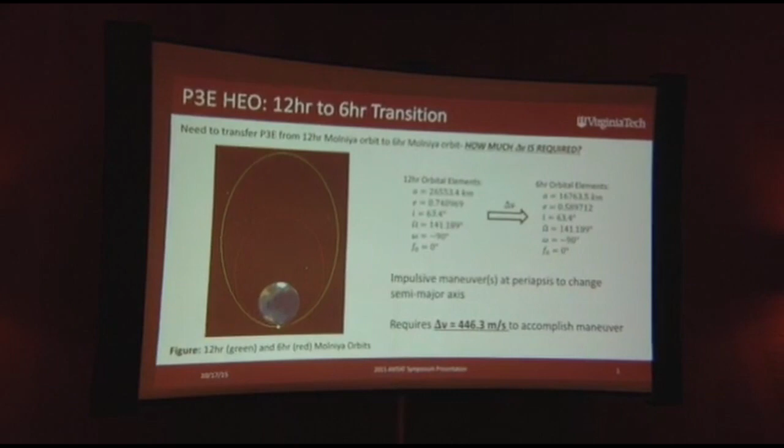So let's talk about that giant orbit transition. This is a huge orbit transition. We're basically cutting the orbit in half. So you got a 12-hour Molniya orbit. It's inclined at 63.4 degrees. The reason is because when it's inclined at 63.4 degrees, the argument of periapsis will not precess, according to averaged orbital element theory.

And then, the Russians figured this out, and they did some kind of spooky stuff back in the 50s and 60s with their satellites. But we like this because it gives you a very predictable ground track. Okay, so what happens if you want to try and go from a 12-hour orbit down to a 6-hour orbit? You got to do a burn at periapsis.

So let's say we've got a periapsis, so the altitude of the satellite that's closest to the Earth, of 500 kilometers, and then it's like 40,000 kilometers apoapsis up here. So if you want to lower your apoapsis altitude, you need to burn at periapsis, okay? And if we wanted to do that, just regular impulsive orbit element theory, you're going to need a delta V of 446 meters per second. That is just a ginormous amount of thrust for a satellite that currently does not have a rocket on board.

Can everyone see this figure? Trust me, it's awesome, it's there.

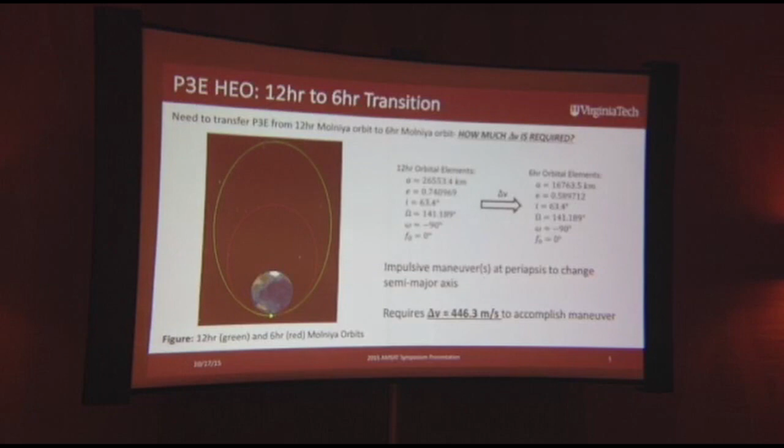All right, so we need to come up with a different approach. So there's two different approaches. Let's talk about engines only and then aerobraking, which I learned about how to do about a month ago, so it's fresh in my mind. So if we want to use engines only, let's just throw away the fact that the Earth has an atmosphere. We're going to keep the periapsis altitude at 500 kilometers, and every time it traverses periapsis, you do a quick little burn to lower the apoapsis.

Now, if you do it all in one burn or you do it in 1,000 burns, it does not matter. It's still going to take 446 meters per second of delta V. That's just how it goes. So it's a measure of how much fuel you have to use, how much energy you have to take away from the orbit to make that transfer.

Now, engine-only maneuvers are great because they can take less time to perform the maneuver. They're a lot easier to analyze, they're a lot easier to model, but they have the massive drawback that they require more fuel. I don't even have a rocket right now, okay? So we need more restrictive assumptions on the satellite and on the environment that it's operating in. And also, like I said, one large burn or lots of little burns still equate to the same amount of delta V. Okay, well, let's think about a different way to handle it.

So aerobraking has been used to great effect for Mars missions and other things where they're coming into a planet like Mars just screaming fast, and they want to lower the apogee of the satellite, apoareion. So this is a more realistic model because now the planet we're orbiting has an atmosphere, which I can tell you it does. It also has the nice advantage that it allows for a smaller engine to be used. So smaller engine, but you have to trade it off. You're going to have to turn the engine on more times in general.

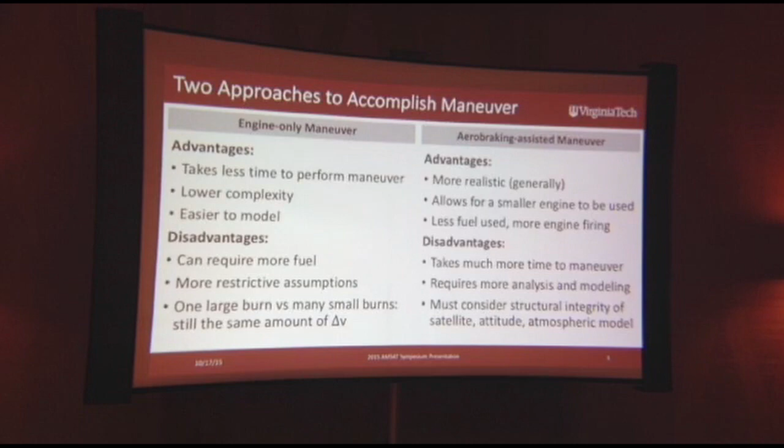Okay? So that's nice, but it does take a lot more time to do the maneuver. And it can be really hard to predict how long that maneuver will take. This takes a lot more analysis and modeling, so finding out that it took 446 meters per second of delta V for the engines-only maneuver, that took about 30 seconds. This aerobraking thing took me weeks to figure out because I didn't know how to do it.

Now, we also have to consider a much more practical issue, which is the structural integrity of the satellite. You're going to be flying through the atmosphere. Satellites are basically made of tin foil, and if you're lucky, they're going to have some strong support trusses in there. But satellites are not made to carry aerodynamic loads. And now we're talking about a satellite where we're actually going to have to worry about that. So, I'm not solving that problem for you. You just get to think about it.

That's for you. Also, we have to consider attitude because the pose of the satellite relative to the incident velocity is going to make a huge difference in how long it takes this maneuver to occur. And then there's the atmospheric model. Modeling the upper atmosphere is kind of hard. They've got entire branches of the Navy doing this. So in my analysis, I use the NRLMSISE-00 atmosphere model. If you've ever played with STK, it's a button you hit, you can use it.

All right, so we're going to talk about aerobraking now. So this required a lot more analysis. It wasn't just figuring out what the boundary conditions have to be and exactly how much delta V it is. Now we're going to be flying through the atmosphere. So going back to this initial condition right here, this green orbit, this is what we're starting from.

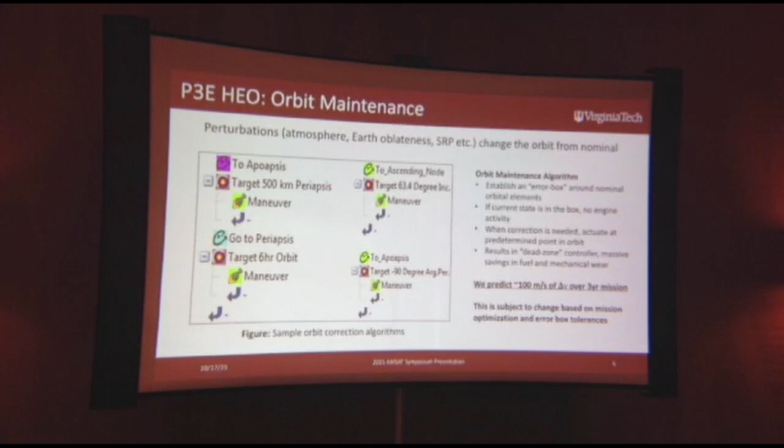All right. So now we're in our nice 6-hour orbit, so now we need to start doing orbit maintenance. The way we do this is we say, I've got some box of initial conditions that I want to stay in, okay? So I set up some bound on my periapsis and apoapsis altitude, eccentricity, inclination, argument of periapsis, all the orbital elements that I like to think about. So I've got some nominal set that I want to maintain, and then I just let it go. I've turned on every single perturbation that's in Satellite Toolkit. I've got the entire solar system. I've got a high-fidelity atmospheric model. I've got the WGS-84 Earth model.

I've got solar flux, geomagnetic flux. I got the tides. I've got everything, all right, because I can. It was awesome. And then we just let it go forward for 3 years, just because I picked 3 years. It can be as long as you want it to be.

And so the things that we need to correct are, we need to correct the argument of periapsis. So, in the ideal case, you set it to 63.4 degree inclination, the argument of periapsis isn't going to change. Well, that's only for the J2 perturbation, the kind of fat donut running around the Earth's equator. You add in other stuff, that number changes, and it's impossible to figure out exactly what it's going to be. So, the argument of periapsis is going to change.

The inclination is going to change a little bit. And we don't want it to change too much, because if the inclination changes, then the argument of periapsis changes, and we don't have a mission anymore. And then furthermore, you're flying through some atmosphere at 500 kilometer altitude. You gotta correct when it gets down too low.

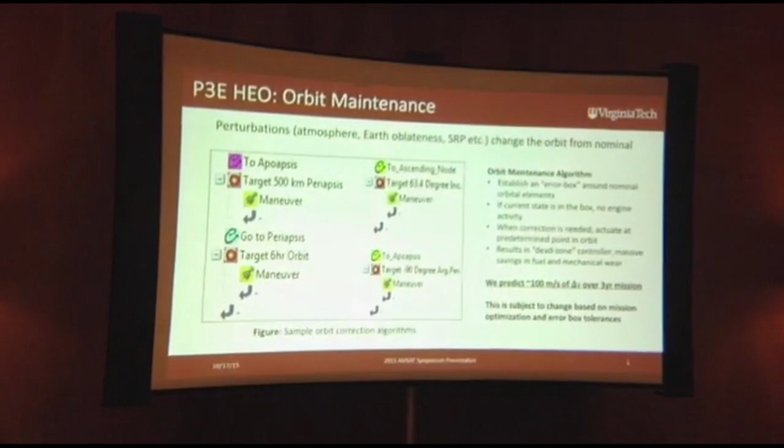But you can see, if you calculate all of the perturbation mitigation controllers, and you calculate the aerobraking, we are still about 1/3 of how much fuel we needed for just the engines-only orbit transfer. That's a huge win. All right, so this can be done. You put a little rocket on there, you can do these things.

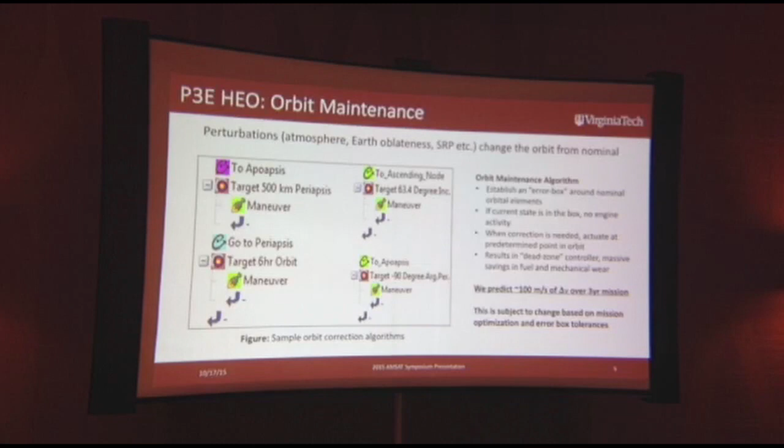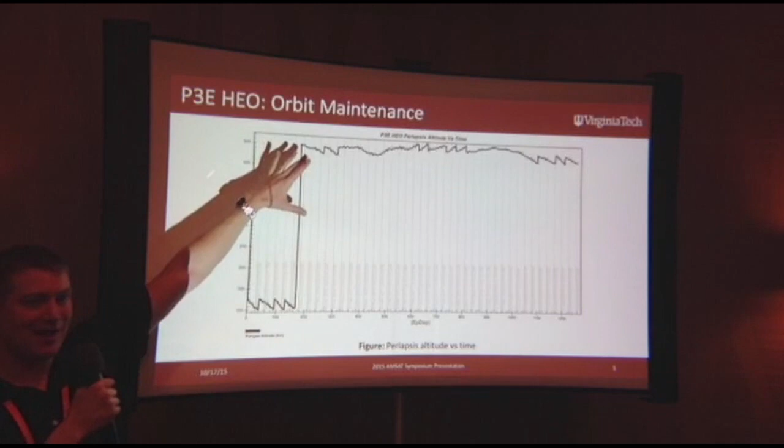We're looking at a couple different little maneuvers to push the periapsis altitude up so it doesn't fall into the Earth, which we can all agree is a good thing. And then once the satellite has pulled the apoapsis in enough, we have to shift it back up so it's got a 500 kilometer periapsis again. Because we don't want this thing down at 125 kilometer periapsis for 3 years. That's way too much fuel. That doesn't make any sense.

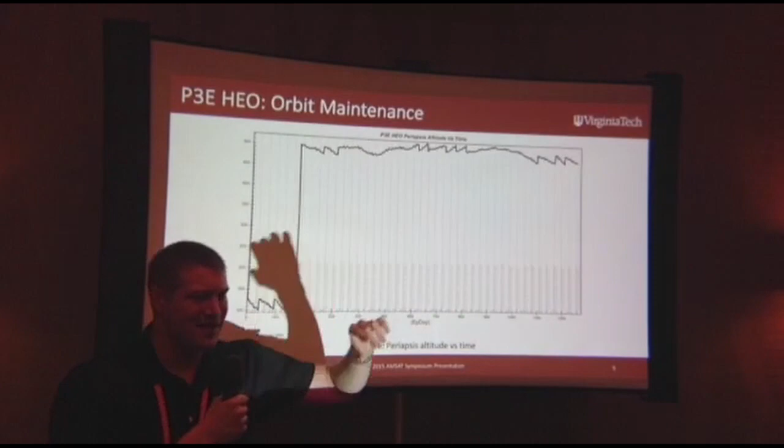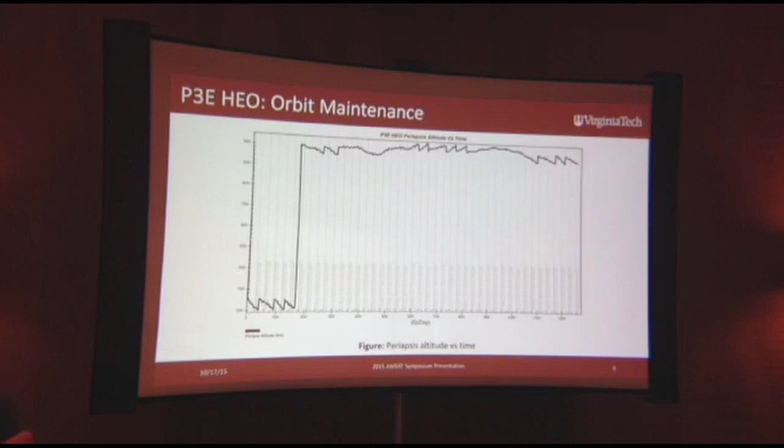So once it's up here at 500 kilometer periapsis, there's a couple quick little burns, and you can make this as coarse or as fine of a control adjustment as you want. This is up to you as the users to figure out what you want to do. But in general, the engines are not on. This thing is barely ever turning on its engines, and that's a big win for us.

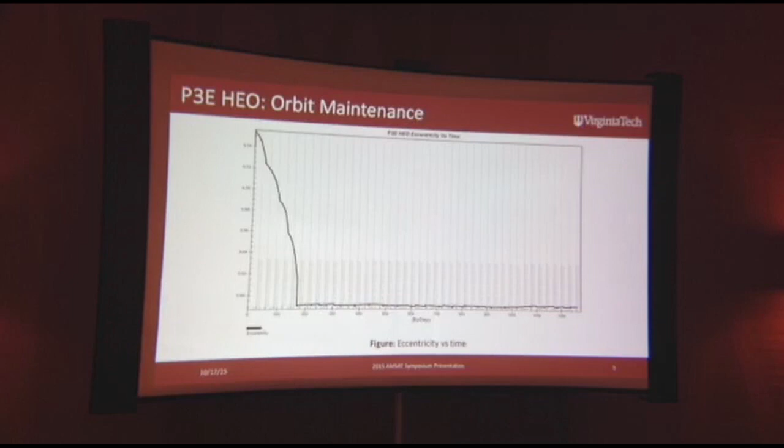Here's eccentricity. If your periapsis is the same and your apoapsis is changing, the eccentricity is changing, so that's all I have to say about that. Now, inclination. I predicted you only needed one plane change maneuver to correct the inclination, and that's good because inclination is extremely difficult to change. And in fact, the reason the Russians like using Molniya orbits is because where they launch from Kazakhstan, they want to get down to the geosynchronous belt to keep their satellites there. It's actually more fuel efficient to go to Mars than it is to go to geosynchronous. Come on. That's ridiculous.

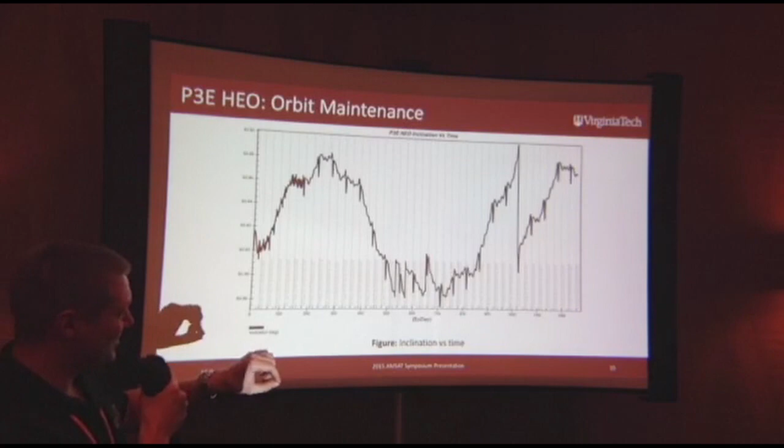All right. So this is just a quick little burn here to correct a 1/4 degree change in inclination. We only have to do it once, and we expect that. We want to try and minimize how many of these we have to do. And then correcting the argument of periapsis.

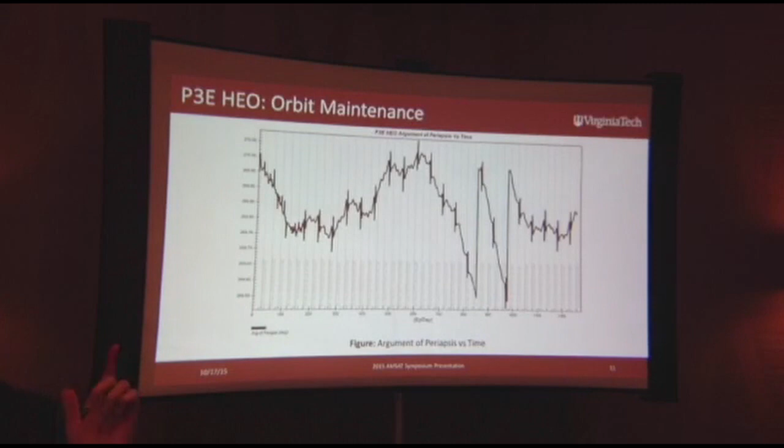This thing's going to be perturbed for 3 or 4 years. It's going to have to get changed eventually. So we found that we only needed 2 periapsis corrections, argument of periapsis. All right. So I've told you about aerobraking. I learned about aerobraking about a month ago. It was totally awesome.

And all this analysis leads me to believe that you probably don't have to put a very big engine on board P3E when you go to launch it. So we've got very sparse engine activity, and you want that since you currently don't even have an engine. And so there's room for additional optimization. So that's all I've got. I'll take your questions now.

I'll start with you. What kind of engines are you going to have on the spacecraft? No idea. Sorry, I don't know. I'm totally confused. Okay.

As I understand, the satellite will originally be put into a 12-hour orbit. Yes. Number one, why do we want to change that? It seems like it's a pretty good orbit. I thought you were going to say that, Bob. So, okay, we're being forced to change it because of other circumstances. I guess I understand that.

Are we concerned about the heating problem when we're doing the aerobraking? That's the other thing that worried me a little bit. Potentially. So this is something that I'm going to have someone that knows a lot more about heat transfer than me figure out, because the amount of thermal heating is highly sensitive to your periapsis altitude. So if you set that periapsis altitude really low, you're going to have to really worry about it.